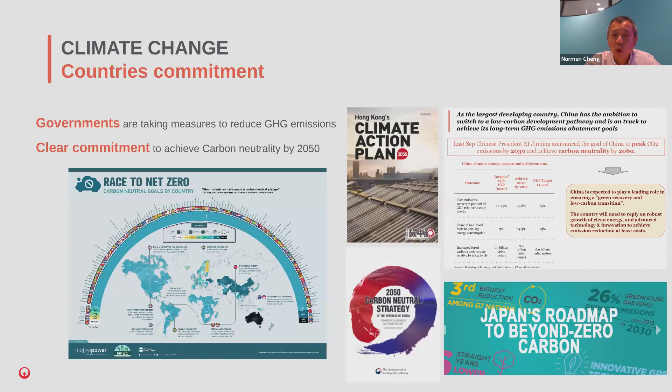For example, in China, ahead of COP26 in October 2021, they officially submitted their carbon neutrality before 2060 target and updated NDC targets to the UNFCCC. In Japan, at the Leaders Climate Summit in April 2021, they announced a new 2030 domestic emissions reduction target of 46% by 2030 from 2013 levels, with possible additional measures to achieve a 50% reduction. In South Korea, the NDC announced at COP26 set a target to reduce emissions by 40% by 2030, below 2018 levels. A lot of countries have already set very aggressive goals to tackle this problem.

Obviously, Hong Kong is no exception. As highlighted in the Climate Action Plan 2050, Henry has already described that Hong Kong will strive to achieve carbon neutrality by 2050.

Hong Kong is very much in support of tackling climate change, and the government's unrelenting effort over the past years has led to many action plans. The latest is the Climate Action Plan 2050, which highlighted the major carbon emissions in Hong Kong, attributed to power generation at approximately 66%, transport at 18%, and waste management at 7%. Other plans have been developed to supplement the Climate Action Plan, highlighting measures to be implemented to tackle these problems.

As for Veolia, our purpose is to contribute to human progress and to the Sustainable Development Goals set by the United Nations, in order to achieve a better and more sustainable future for all of us. In this way, Veolia prepares for the future, protecting the environment and responding to humanity's vital needs. There are 17 Sustainable Development Goals identified by the United Nations, and our company has direct impacts on 13 of them, especially in areas related to the planet, society, employees, shareholders, and our clients. At COP26, Veolia mentioned it was preparing to double its commitments for reducing greenhouse gas emissions while reinforcing its reputation as the leading partner for its customers' low carbon and resilient strategies.

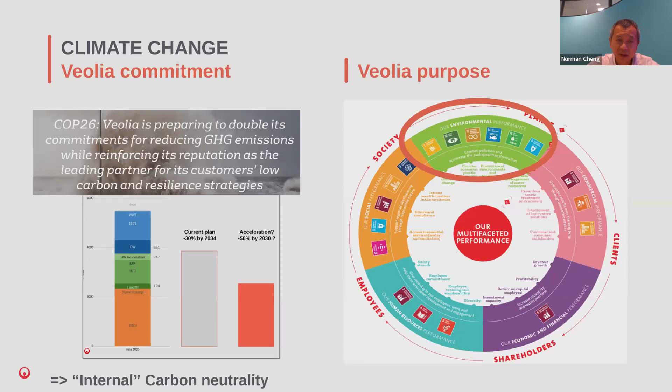So in September 2021, Veolia also signed the Business Ambition for 1.5 degrees Celsius and committed to define, by the end of 2023, a new reduction target aligned with the latest criteria of the Science Based Targets initiative, integrating Scope 1, 2, and 3 emissions, including N2O and methane, into the calculation.

So what does it really mean by the Science-Based Target Initiative? The SBTI is actually a partnership between CDP, the United Nations Global Compact, World Resources Institute, and the World Wide Fund for Nature. They have developed the SBTI Net Zero Standard, which provides guidance and tools for companies to set science-based net zero targets.

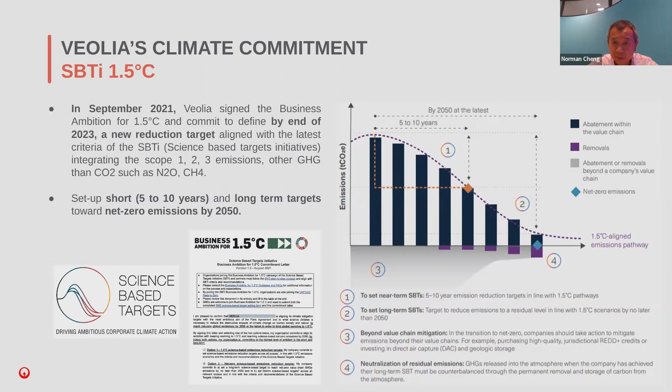So really, what does it mean by Scope 1? This is very important for companies to understand their own carbon emissions. For that, we talk about Scope 1, Scope 2, Scope 3, and possibly even Scope 4.

There have been a lot of buzzwords in terms of carbon emissions or carbon neutrality. We very often talk about carbon neutrality or net zero. Net zero very often refers to the amount of all greenhouse gases, such as carbon dioxide, methane, or even sulfur hexafluoride, that are removed from the atmosphere being equal to those emitted by human activity.

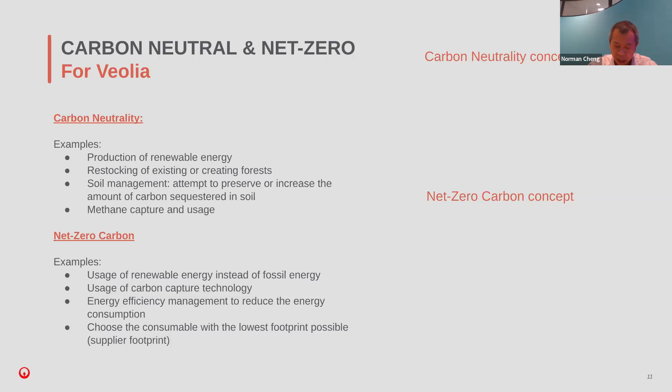But on the other hand, carbon neutrality specifically refers to the amount of carbon being removed from the atmosphere being equal to the carbon emitted. In essence, it's a slightly more narrow term than net zero, especially focusing on the removal of carbon. So in short, achieving net zero and carbon neutrality has the same sort of end result: removing harmful emissions from the Earth's atmosphere. But the scale and kind of emissions removed are slightly different.

So as I mentioned, in terms of carbon audit or carbon emissions, we very often talk about 3 different scopes, or even 4 different scopes.

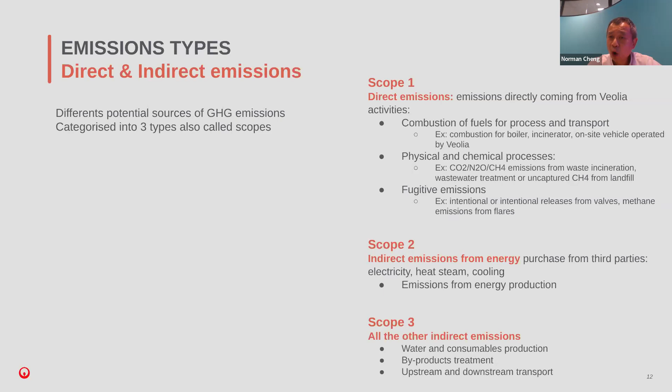For Scope 1, we are talking about direct emissions from our own activities. For example, if we are talking about an incinerator, if we need fuel to heat it up to get the temperature up, that would be calculated as Scope 1 emission. Similarly, if we need fuel for the combustion of the boiler, that would be calculated as direct emission in Scope 1. Also, if we are operating on-site vehicles, such as diesel vehicles, that would be part of the direct emission.

In addition, if we are operating an incineration unit and there is direct emission in terms of carbon dioxide, methane, or other gases, that would be classified as direct emission. For example, if we have uncaptured methane at the landfill which escaped into the atmosphere, that would be considered part of direct emissions as well.

For Scope 2, that would be indirect emissions from energy purchases from third parties. For example, if we are operating a plant where we need to purchase electricity from either CLP or Hong Kong Electric, the emissions from energy production would be counted as Scope 2 emission.

And as for Scope 3, it's all the other indirect emissions such as water and consumable production, byproducts treatment, or upstream and downstream transport as well.

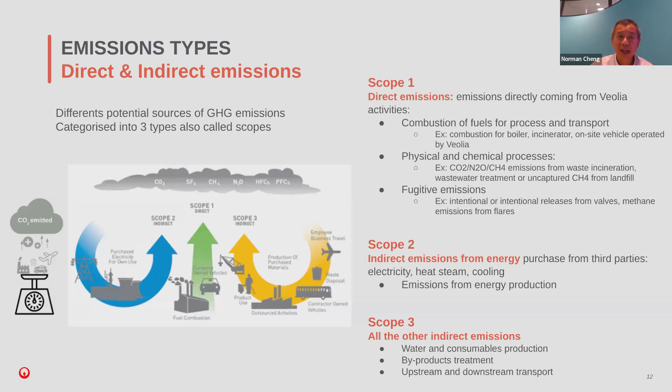And as I mentioned, there is now Scope 4, and Veolia is now taking that into consideration as well. This is what we call reduced emission or avoided emissions.

So reduce emission is how we use maybe renewable energy to reduce our energy consumption on site. For example, if we were to implement solar panels, or use the methane generated in the anaerobic digestion unit for wastewater treatment plants - this methane could be captured and used to produce electricity as a result. That would be more in terms of what we talk about as reduced emission.

As for avoid emission, this is for third parties. We have cases in landfills where we produce excess methane, and this methane is actually provided to other companies, for example Towngas or CLP, where they would use this gas for either injecting into their grid or producing electricity as a result. That would be more or less avoid emission.

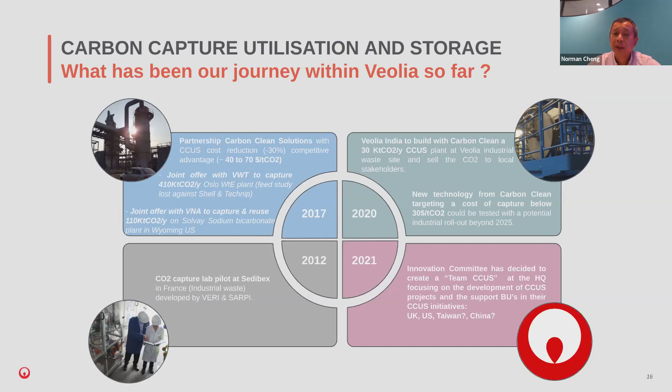In Veolia itself in 2021, we have established an innovation committee, which has decided to create a team called CCUS at the headquarters, focusing on the development of carbon capture utilization projects. So we are actually looking into developments in the UK, in the US, in Hong Kong, in Taiwan, and in China as well.

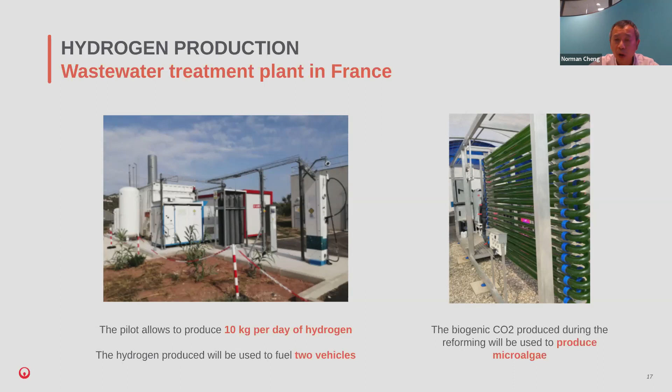These are two other examples that we are working on in France. For example, we are trying to produce hydrogen from a wastewater treatment plant in France, approximately 10 kilograms per day, which would be used to fuel two vehicles. Whereas on the right-hand side, we do have a pilot which uses algae to capture carbon dioxide. So this is some of the initiatives that we have in France.

So back to Hong Kong, basically. I just wanted to maybe give you a glimpse of what we do in Hong Kong in terms of our decarbonization effort.

T Park, we did design and build this plant, and now we are actually operating the plant on behalf of EPD for 15 years. It started in 2000, the operation phase started in 2016. This plant is able to reduce 2,000 tons of wet sludge per day. All municipal wastewater treatment sludge from the municipal wastewater treatment plants actually comes to this facility for treatment.

Basically, this is a self-sustaining facility. What does that mean? We are not connected to a water supply network nor a drainage services network. So we take water from the sea. There's a small desalination plant on site where we take seawater and convert it into fresh water for either drinking purposes or for process purposes. The wastewater produced on site is actually treated to recycling standards so that it could be used for toilet flushing and also for irrigation purposes.

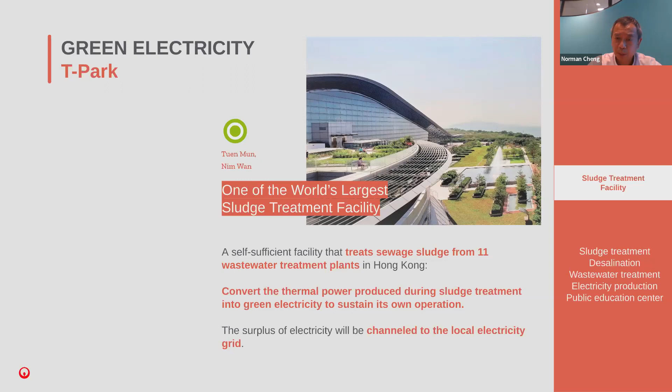We are also operating another facility called O-Park, and this is the first food waste recycling facility in Hong Kong. It takes approximately 200 tons, or is designed for 200 tons of food waste per day. It also utilizes the anaerobic digestion concept, where methane would be generated, and that methane would be fed through to a CHP, where electricity would be produced as a result. In that sense, it is also self-sufficient in terms of energy. Excess electricity will be supplied to the grid, operated by CLP. And the solid digestates would go through a composting unit, where it would be transformed into compost or soil conditioners.

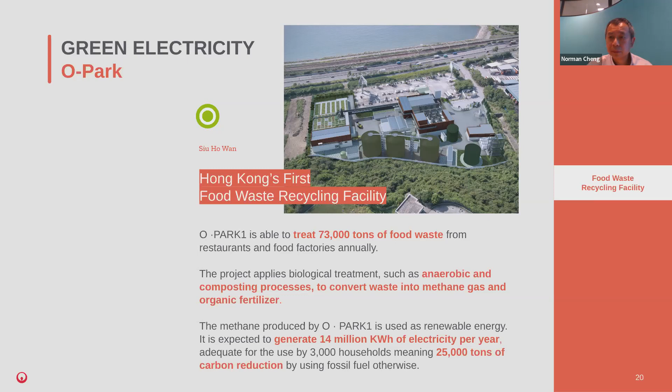When we talk about decarbonization, this is something where we are trying to reduce a lot of energy use, and a lot of avoided emission as well in terms of carbon reduction.

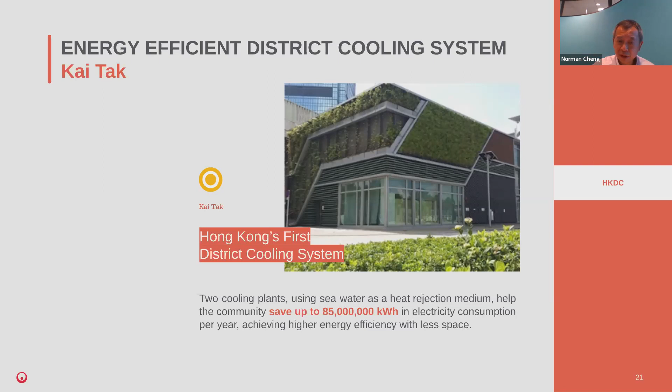In terms of energy management, we are operating the district cooling system at Kai Tak. By utilizing a centralized district cooling system, it would be approximately 10 to 12% lower than having individual chillers at each location. So by using this, it would be able to save up to 85 million kilowatt hours per year, achieving very high energy efficiency with less space.

One of our solutions is that we have developed our own energy optimization system as well, which is a more real-time data monitoring and analysis tool. This would help to boost energy efficiency as it collects, monitors, analyzes, and then controls energy, water, and waste flows in real time. It would then help to define areas for optimization and also predictive maintenance in order to boost performance.

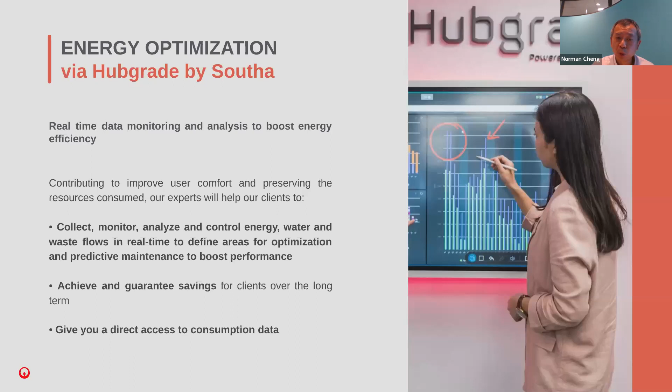As I mentioned, in the Climate Action Plan 2050, 7% of the carbon emission is actually attributed to waste management, because we still rely heavily on landfills for disposal of waste. We are actually operating the landfills in Hong Kong, and what we are trying to do is really maximize the methane that is generated on site. The landfill itself actually serves as a very large anaerobic digester, so methane would be produced as a result. If methane escapes into the atmosphere, this is about 28 times worse than emitting carbon dioxide. So our goal is to capture as much methane as possible, and by doing so, we first capture the methane for internal use, such as using the landfill gas for ammonia stripping or for our wastewater treatment plant, and also for our administration building as well.

But excess, we would deliver the gas to either town gas or CLP for their further usage. This is a way to minimize or reduce scope 1 of our carbon emission as well.

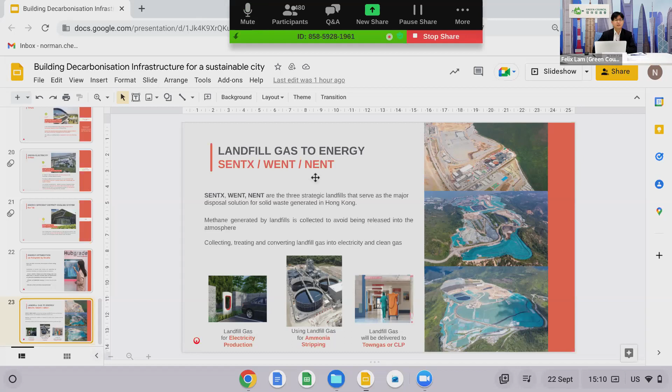Thank you, Norman. You gave us a lot of options and solutions. We found some questions from the audience. The first one is, will you please elaborate on the major differences between carbon neutrality and net zero? Is there any international definition?

I think as I mentioned, net zero refers to other gas emissions as well, including nitrous oxide or sulfur dioxide, for example. So the definition itself is a little wider. In terms of carbon neutrality, we are really focusing on the carbon emission itself. So that's the slight difference in terms of definition. But at the end of the day, we are talking about removing harmful substances from the atmosphere, and both definitions are trying to achieve the same results. But net zero has a wider context than carbon neutrality.

Yeah, thank you for a quick answer. Another question is, among your mentioned infrastructure, which one should be built more to fully maximize the decarbonization potential for Hong Kong? Maybe I'll add, with limited supply of land in Hong Kong.